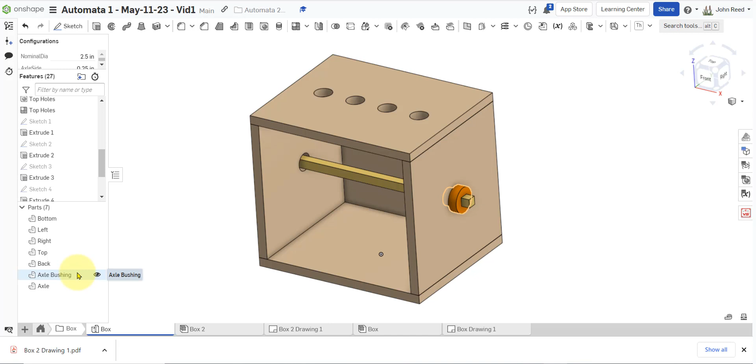Let's make some drawings of the axle bushing and the axle. So what I'm going to do here is go to the axle bushing and right click hide other parts, and there it is. That's what it looks like.

When we put it in the drawing, let's think about what our best front view is. Even though it's kind of round, I think it's probably the front view here, that view right there. So just like that, or actually turned around 180 so that the right view doesn't have any hidden lines.

So let's try that. Let's create a drawing here. We're going to use the A template, and remember we want it to look like that but the other way. So here's our front, and what I'm going to do is I want to rotate this.

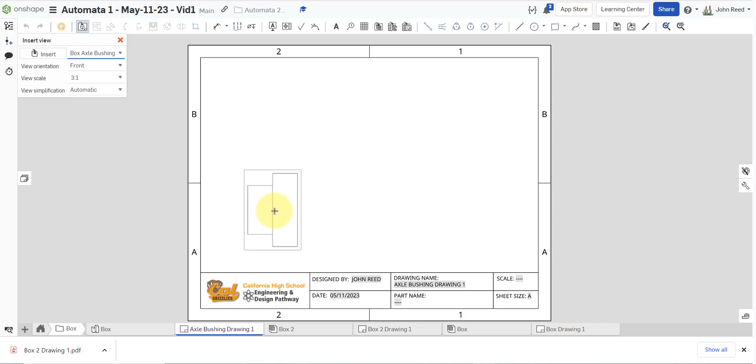I'm going to left click here. If anybody knows how to do this in a more elegant way, let me know. I left clicked once and then pressed escape, and now I'm going to double click on that front view and change the angle here. I think I want to go 180. There we go. So we'll go like that, and then we come back up here to project view.

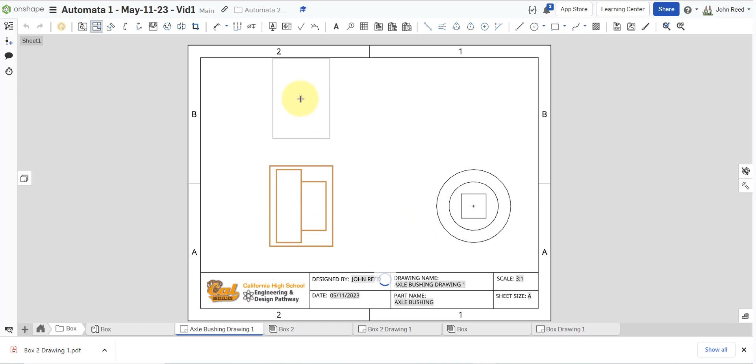We'll click there and then put our front view. I don't know if we need a top view - let's go ahead and put it in there. And here's our isometric up here. And let's make that shaded like so.

Now we can put some dimensions on this thing. Actually, I don't think we need the top, so we're probably not going to keep that one. So how about right here, we'll put that distance 0.25, and the whole thing will be 0.5.

Fair enough. Okay, now we want to have the diameters here. That's 0.5, and this one over here. Let me see if I can move this one over a little bit.

So drawings are all about clarity, trying to be as clear as possible. So you can move things a little bit. That's right, you got to move the front if you want it to go that way.

I'm going to take this one over here like so, and then I'm going to press D to go back into dimension mode and take this guy here. And let's see, we need to - how about that like that, and this one like this.

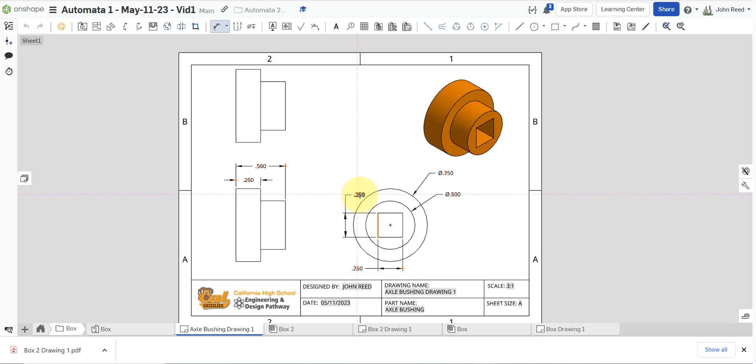And then I don't like it so close to the... Okay, does that have everything? I think it does. Let's go ahead and delete the top view.

What if we were to make a section view, a horizontal section view right through the center here? What would that look like? There we go.

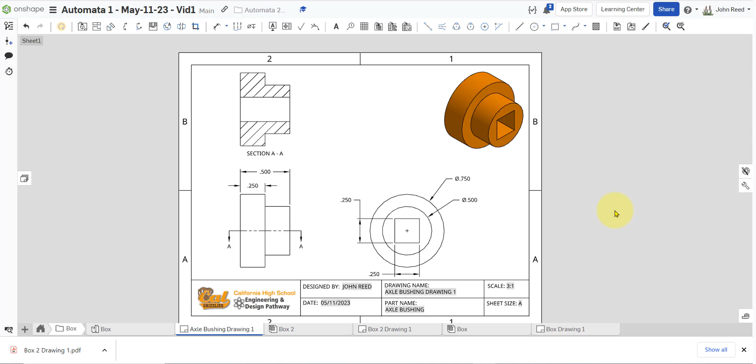I'm going to take that, and that's kind of useful. So I'm going to keep it there for further reference.

And it's a little tight squeeze in here at a scale of 3 to 1. Probably should have changed that to 2 to 1. At any rate, let's see, can I move that over? Yeah, I can move that. Oh no, it's got to be aligned. That's right. Okay, that's a little closer than I like, but we got it.

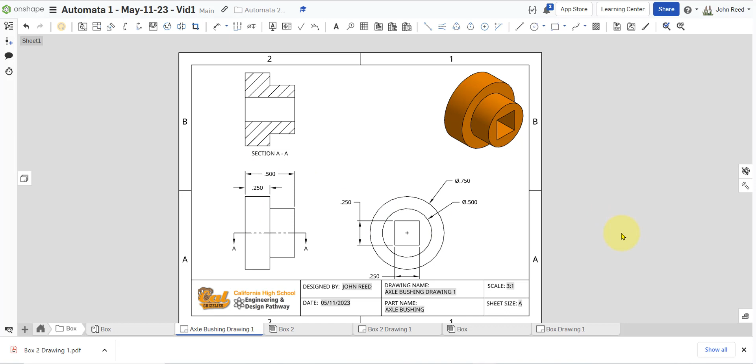So that is our axle bushing. Now let's go back to the box subassembly. We'll turn off the axle bushing and turn on the axle. And let's make a drawing of the axle.

This one should be pretty easy. There's one thing we can do. There it is. What if I went 1 to 1? I put it there, and then over here.

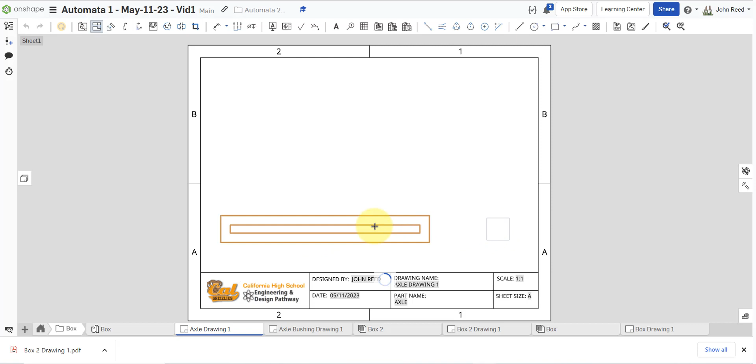And then finally the isometric. This is pretty trivial over here, but I think it's worth doing. So let's put it there. That's going to be, looks like 5 3/4.

And then in cross section, let's zoom up. It's going to be, should be 1/4 each way. There. And well, let's see. That's a little tight. Let's do that.

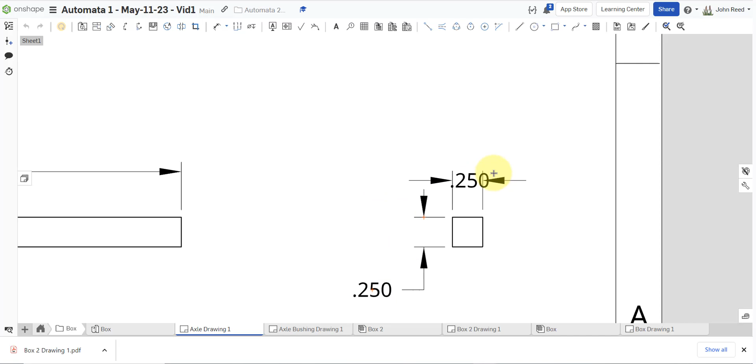Click it right there. And then this one, I think I'm going to move over here so they don't intersect. And then I have the dimension drawing for the axle. There is a way to do a cut here, but I don't think we need it for this guy. So we'll go with that. So those are the drawings for the axle bushing and the axle.